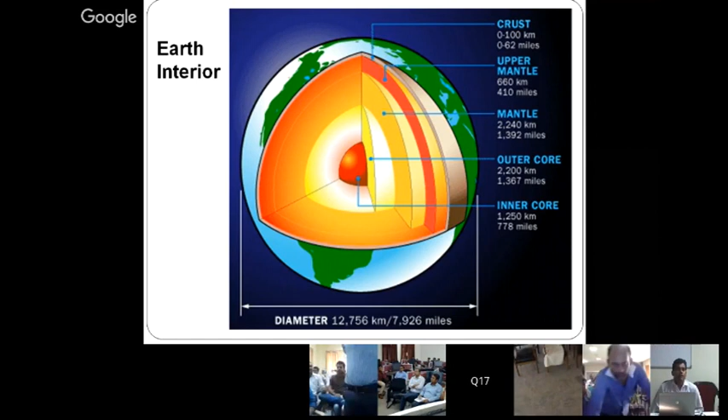So first, this is the Earth's interior. If you look at the Earth from the exterior, we can say our Earth is simple and unique, and integrated with each other, right? That's perfectly right. So when you look into the interior part of the Earth, you can see the innermost core, outer core, mantle, upper mantle, and crust. Crust is the region where we actually are.

So the inner core is a very solid part; the inner core is in the solid form, and the outer core is in the liquid form. The remaining layers are composed of sand and rocks.

So Earth has four major layers: inner core, outer core, mantle, and crust. Crust is the region where we actually are. The crust and the top of the mantle make up the thin skin on the surface of the planet. This skin is known as tectonic plates.

Tectonic plates are nothing but a plate kind of form, made of rock materials. We can say directly it's a rocky thing. Just imagine near the mantle we have many rocky surfaces. Like when you float leaves on water, similarly these tectonic plates exist in our Earth's surface, exactly near the mantle.

These tectonic plates are not a continuous plate. Before 1900, we used to think that these tectonic plates were continuous plates. But later, after 1920, we finally concluded in the year 1960 that these tectonic plates are not continuous; these are broken plates.

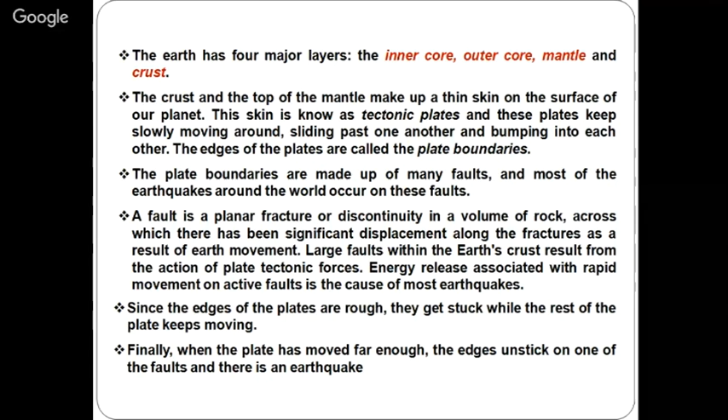Our Indian plate is one of the smaller plates and is merging with the Eurasian plate, exactly in the region of the Himalayan belt. That's why that Himalayan region is referred to as a very active seismic region, and we have many earthquakes there. Because when two plates are merging or colliding with each other, we can expect earthquakes.

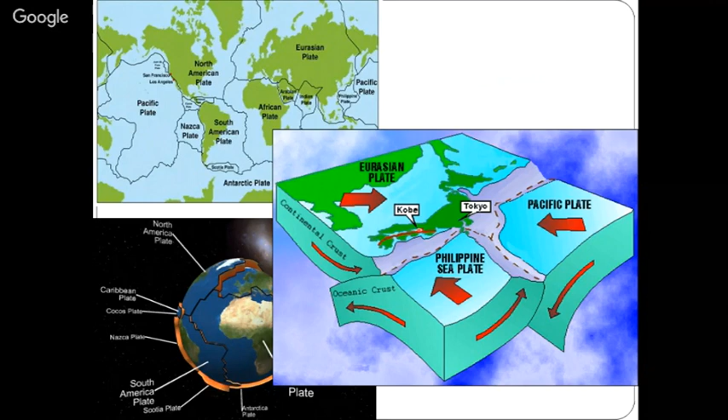It's not a bad thing, first of all. It's a very good one. It's nothing but releasing a sudden energy. So humans are living on the crust, which means the uppermost part of the earth. Okay, so we are thinking that earthquake will kill us. No, earthquake is not going to kill you and me. The building which we are constructing on the earth's surface will kill us.

So we have to construct our building to be an earthquake resistant one, so that we can resist a certain amount of earthquakes by using some modern advanced techniques, and you can easily survive during an earthquake. So earthquake, basically I told you, when two tectonic plates hit each other, there you can expect a certain amount of vibration. This vibration will release in the form of energy.

Because I told you tectonic plates are rocky materials. Rocky materials means it's an elastic material. So these elastic materials will store their elastic energy internally. When two plates hit each other, this stored elastic energy will come out from the internal part of the earth. That point is generally referred to as focus.

So basically, I told you tectonic plates are a rocky surface, but it's not always going to be a rigid surface. In some parts of the rocky surface, we can expect a certain amount of discontinuity in the continuous mass. This particular discontinuity is generally referred to as a fault. That is the weakest part of any tectonic plate. So when earthquake occurs, we can expect it exactly in the fault region.

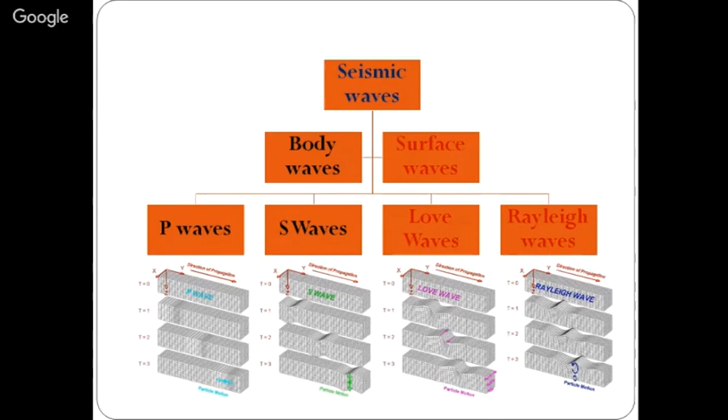These two waves are very strong compared with the body waves, because body waves will easily dissipate, but the Love waves and Rayleigh waves travel on the surface of the earth. That's why these two waves are the major source of any disaster on the surface of the earth, whereas body waves are not. You can see the first picture stands for the primary wave or P wave. This will travel like this.

No, it will travel on the surface only, not internally. That is the harmful one, yes. Love wave and Rayleigh wave are the harmful waves.

The next one, B, you can see the secondary waves. So when you have a rope, and if you play with the rope like this, the rope will travel in wave form. This is the way the S waves are traveling on the Earth's surface. Internally, these are the interior waves, the body waves.

Whereas C is like a zigzag form, and D will travel in a wave form plus it will squeeze. That's why Rayleigh wave is one of the strongest and most disastrous waves, creating huge disaster on the surface compared with any other waves. So primary waves are the fastest, but Rayleigh wave is one of the strongest waves which will create huge disaster on the Earth's surface.

So how do we measure these things? We have two different kinds of measurement for earthquakes. One is magnitude, another is intensity. Magnitude is measured in terms of the Richter scale, whereas intensity is measured in terms of the Modified Mercalli Intensity scale. There are two different scales we have.

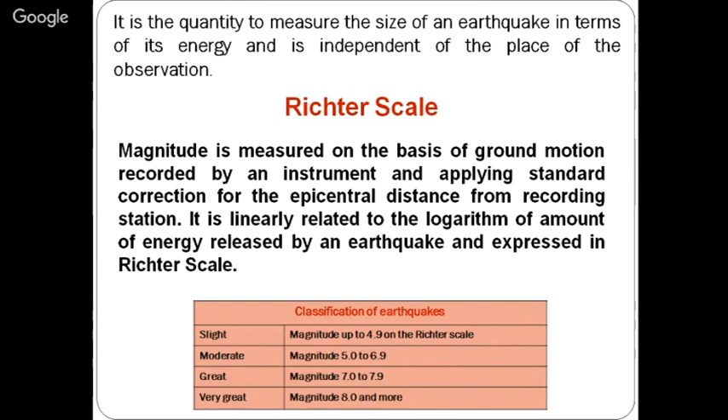So let us see the Modified Mercalli scale. This talks about intensity. What is intensity? Intensity is nothing but the amount of disaster we faced. Like when an earthquake occurs exactly in Chandigarh, the buildings constructed on the Earth's surface there will collapse or get damaged. This damage level is nothing but the intensity - the amount of disaster that occurs, what the damaged portions are, how that structure is damaged.

According to these things, we have created a scale generally referred to as the Modified Mercalli Intensity scale, MMI scale, ranging from 1 to 12. 1 stands for not felt by people, whereas 12 stands for huge or total damage.

For example, if an earthquake occurs at Chandigarh with a magnitude of 7, even if you measure it at America, the magnitude is going to be the same, 7. It's not going to change, but the intensity will differ. In America, the intensity is going to be 1, whereas in Chandigarh, the intensity is going to be 12. So that is the difference between intensity and magnitude.

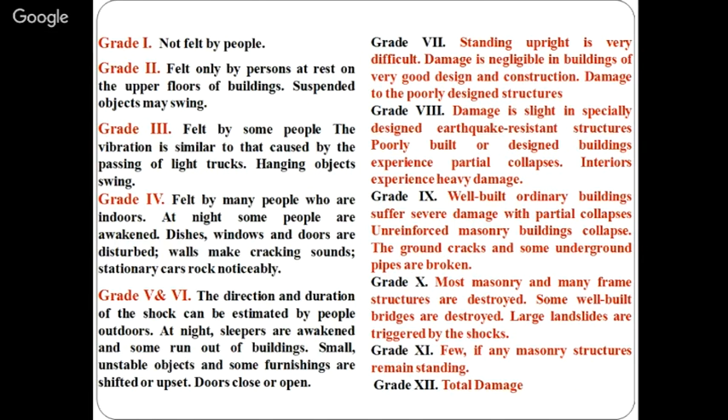What is the difference between zone and grade? Grade is nothing but a scale — grade number 1, grade number 2, grade number 3, like scale number 1, 2, 3, 4. So it is 1 to 12, that's it. Zone is completely different.

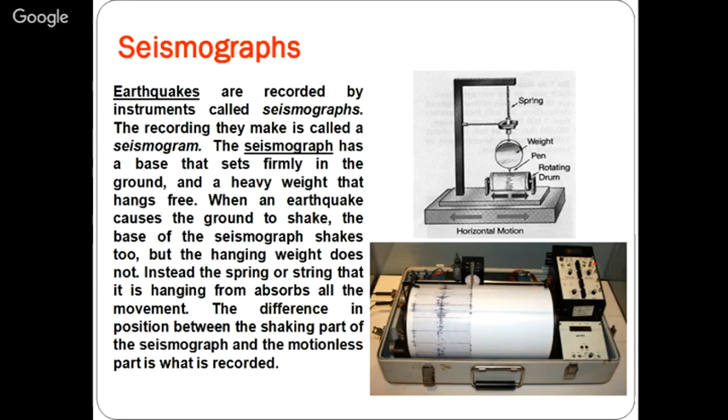In the recent form, we have advanced equipment which can easily measure acceleration, velocity, or displacement directly during an earthquake. Basically, these seismic stations are not on the Earth's surface; they are 10, 20, or 30 feet below the surface, because these equipments are very sensitive. Even if you speak, jump, or travel with a vehicle on the surface, it will record all the vibrations. That's why we keep all seismic stations below the ground surface.

You can see a model accelerograph where the first stands for the P wave — the first wave which informs any seismic station about an earthquake — followed by the S wave, the secondary wave. These two waves are body waves.

Let us come to the surface wave. This surface wave creates huge problems for buildings we have constructed, because these waves travel on the surface. If waves are traveling like this on the surface, and you are constructing a house on it, these waves will create severe demolition or disaster to what we have constructed. That's why these waves are generally referred to as surface waves, or very strong waves compared with body waves. This is how the graph looks, and this is how we separate the graphs to study or monitor.

Initially in the surface waves, the waves starting from S wave to surface wave are generally referred to as forced vibration — this is forcing the entire thing. Following the peak, we see a degradation in the graph, called free vibration, which means if you take a steel scale and vibrate it, it will vibrate for about a second until you stop giving it vibration.

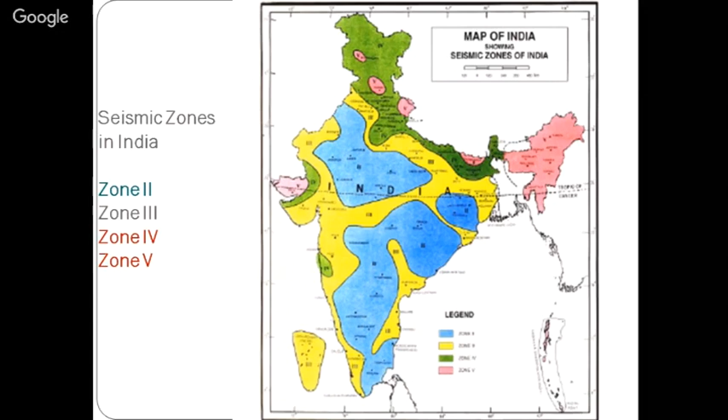I told you our Indian plate is merging with the Eurasian plate exactly in the Himalayan belt. That's why it is marked in zone number 4 and 5. Zone number 4 is green color, zone number 5 is pink color. You can see our Bhuj area in Gujarat and other parts of the Himalayan belt are marked by pink and green color. These are very important regions which stand for high numbers of earthquakes during a year. So we can't expect that an earthquake will occur in the next 6 months or next 1 year - at any time it may occur, but the intensity is going to be very high in those regions. That's why it is marked by zone number 4 and 5.

So what are the effects of an earthquake? You can expect landslides, surface faulting, tsunamis, liquefaction, and flash floods. If an earthquake occurs on the surface, we call that an earthquake. If it occurs below the sea, that is generally referred to as a tsunami.

I told you an earthquake is nothing but a sudden release of energy. If the sudden release of energy happens below the ocean, what happens? The water present on the sea surface has to absorb the energy and dissipate it. That is happening exactly at sea level.

During an earthquake, exactly at the midpoint of the sea, the depth is very large compared to the shore level. That's why there is no sign of wave movement during an earthquake occurring below the sea surface. But the tsunami will create huge disaster exactly at the shore level, not internally, because the depth in the middle of the sea is much larger compared to the shore level.

That's why the shore level depth is not sufficient to hold the energy released during an earthquake. That's why it dissipates there, so we can expect tidal waves up to 10 or 20 meters in height. That is nothing but the stored, released energy causing the tidal wave to travel to that height - the wave itself is not traveling that high, it is the released energy tending the tidal wave to travel up to that height.

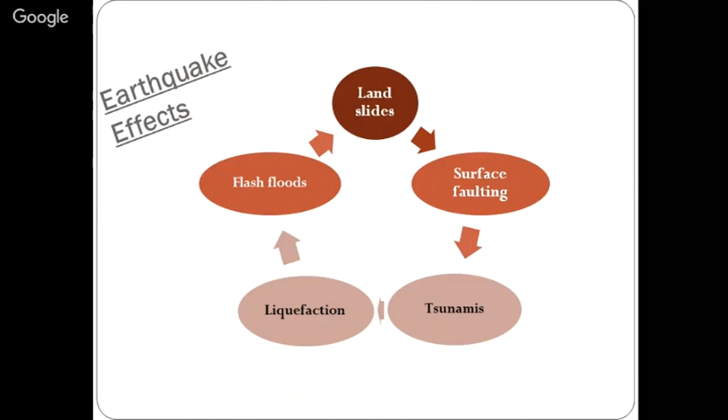Liquefaction - I didn't mention this, there is no slide for it. Liquefaction is: below the ground surface we have a groundwater table. When the entire earth surface gets vibrated during an earthquake, this water table will come up. When the water table comes up, a certain amount of settlement happens immediately. That is generally referred to as liquefaction.

So these are the different types of failure modes which we observe during an earthquake.

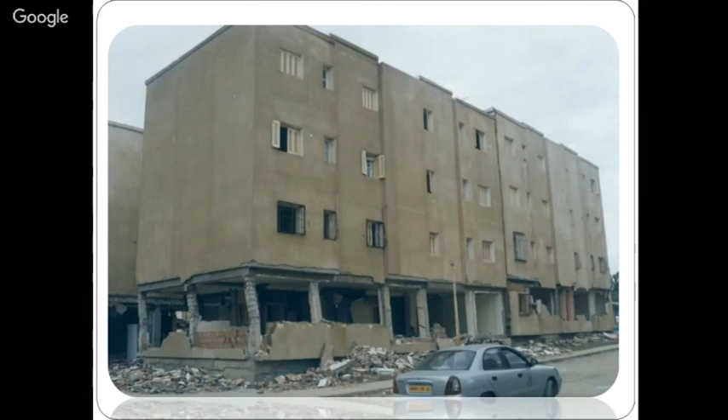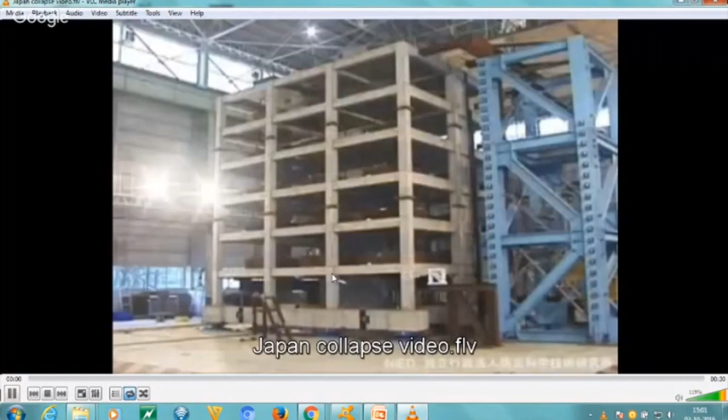So this is the building, ground story plus 5-story building. You can see this is being tested in a shake table. A shake table is nothing but an equipment which will give you a certain amount of vibration. You can define an earthquake vibration. So that will apply the vibration to the particular building so that we can study how the building behaves during an earthquake, a real earthquake. Okay.

So this is a G plus 5-story building. The ground story, again, in all the stories, there is no brick wall. It is a bare frame. Okay. So during an earthquake, how the building will behave, you can see. Now they are applying vibration.

So in this video, you can see the top stories still remain, except the ground story. The ground story is completely collapsed because, as I told you, this is a soft story and it is more flexible as compared with the other stories. The stiffness level of that particular story is very, very low as compared with the above stories. That's why exactly failure occurred in that particular story. These kinds of failures are generally referred to as soft story failure.

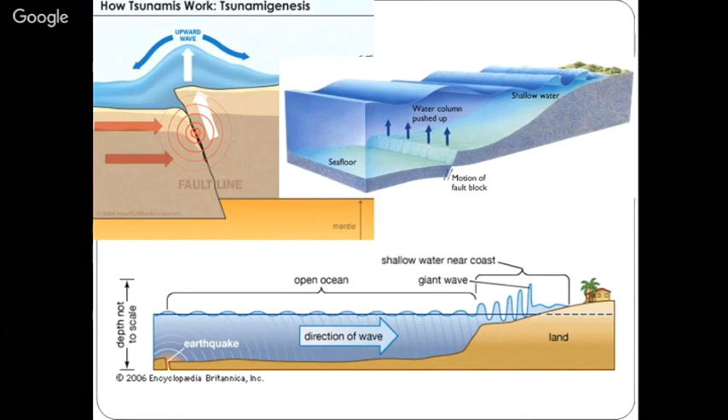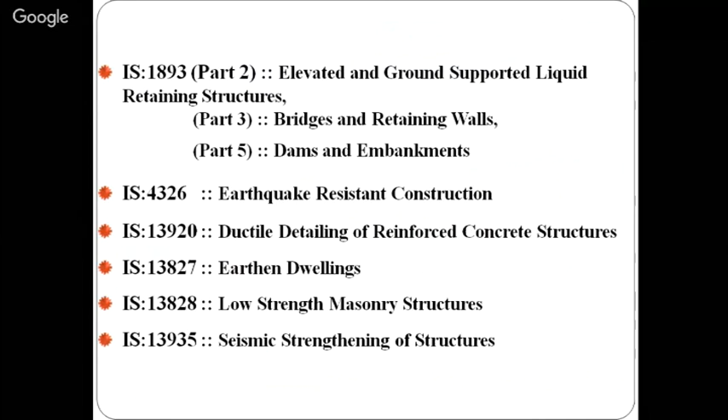So what does it mean? What is the difference between proof and resistant? Proof means nothing will happen, whereas resistant means something will happen to a building, but it is not going to collapse completely. That is the meaning of resistant, and that's the difference between resistant and proof.

Most Indian low-rise buildings are constructed in this form only, using the load-bearing structure concept, because it is quite economical as compared with RCC frames and very cheap, and even non-skilled labor can construct this kind of building. That's why most low-rise buildings are constructed with the help of this concept.

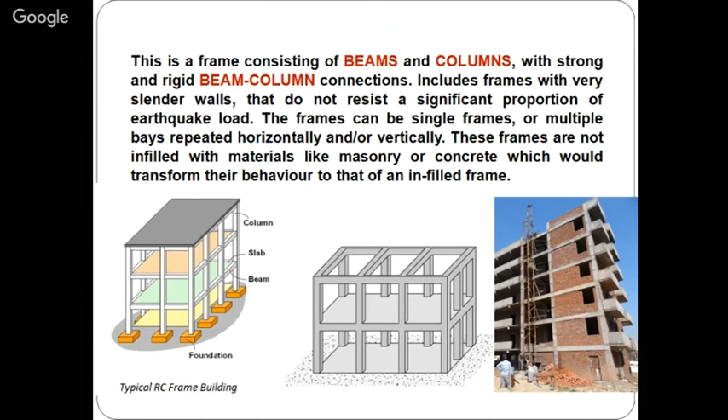In this building, the very important part of the building is not the column, not the beam, but the connections. Connections at all levels. So you can see the foundation to column connection is very, very important. And similarly, the beam to column connection is one of the very, very important parts of this particular building. We will see why it is very, very important.

So what are the things we can do? Earthquake resistant measures at planning stage. It should start from the planning stage. Like, see, if you have a solid surface, we can execute the construction immediately from the foundation. Suppose your foundation level is not solid, so if you are filling with soil, our foundation should not be on the filled up soil. The reason is an existing firm soil has a very good consolidation as compared with the filled up soil. So you can't meet the consolidation level of the firm soil using filled up soil.

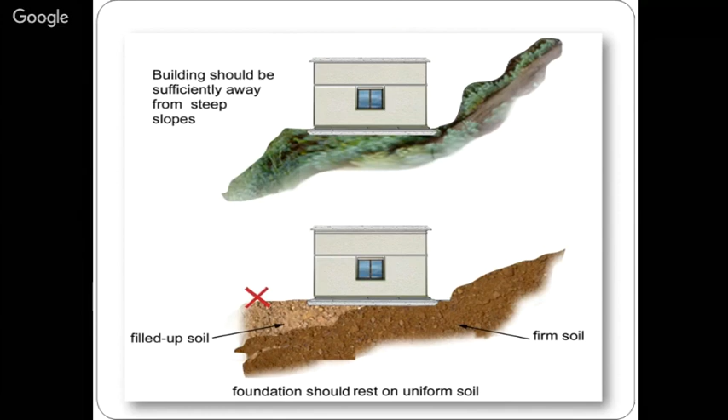So in such circumstance, you can go for raft or pile foundations, because we need pile foundation only in the filled up soil surface. Whereas in the firm soil, the consolidation level is already good, so there is no need to go for extra consolidation or any pile construction. So you can go for pile construction.

The next one is, if your building is not only in rectangle shape, we can expect T, L, U, or C shape, any shape. But the thing is, one building should not have contact with another building. So the first is T plan. The next one is how it should be. The T should have a separation joint.

The reason is, if you take two stainless steel scales and keep them with each other, okay, and try to vibrate it, what will happen? One steel scale will touch another steel scale. So what does it mean? The effect of one will create effect on another. That is the meaning for this.

So when you have two different buildings, we should have a proper gap between these two buildings. So what will happen during an earthquake? Both the buildings will vibrate in their independent mode. So one vibration will not create any problem to the next building. That's why we have to have separation joints between any part of the building.

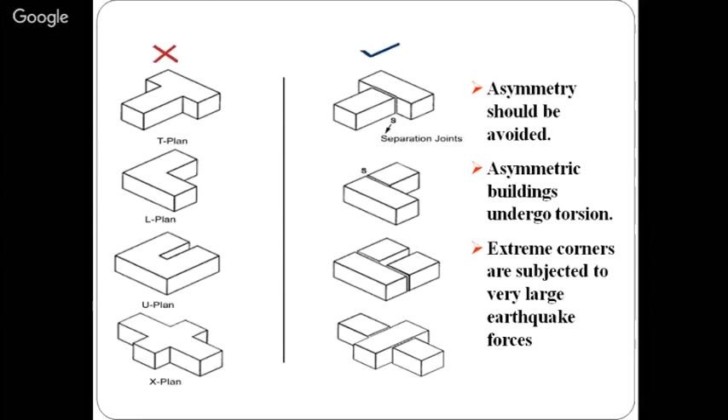I told you, if your building has no connection... so the first image stands for how it should not be. The next one is how it should be. So when you have connection, the failure will exactly occur at the corner point. When you don't have any connections, both the buildings will vibrate in their own mode. So this is how it should vibrate.

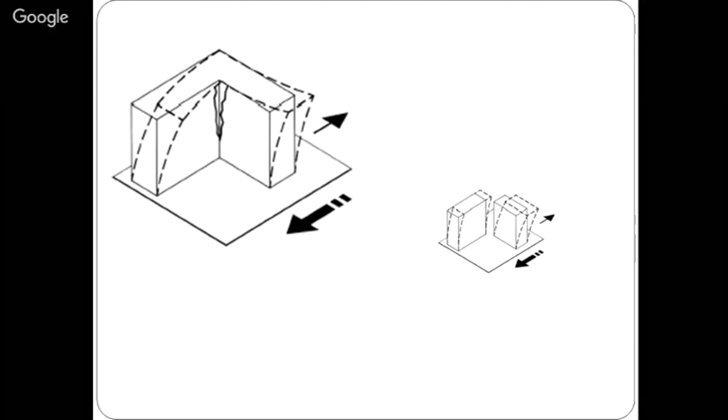Next one is, we have water. Just give me that.

So you can see this example. This is the water can I have, and now even if I vibrate the table, the water can is going to be in ideal condition. The internal liquid in the water can is vibrating. Even still, the entire water can is also vibrating, but it is not falling down. The reason is the base is very solid, whereas the top has a narrower portion. That's why it is not falling down.

Suppose if I keep it like this, the base is very small as compared with the top. Now, even if I apply small vibration, the entire water can collapses. Okay. PPT.

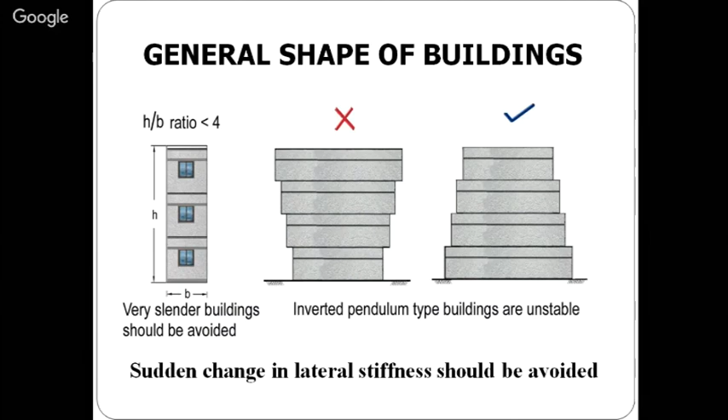See this case. That's why our earthquake resistant design philosophy says that the foundation width should be higher than the top width, so that it can easily resist any kind of earthquake. So plan wise, we have to make our building safe, and elevation wise, we have to make our building safe. If we have different height buildings, again we have to make proper separation joints. Otherwise, the vibration of one part will create adverse effect on the other.

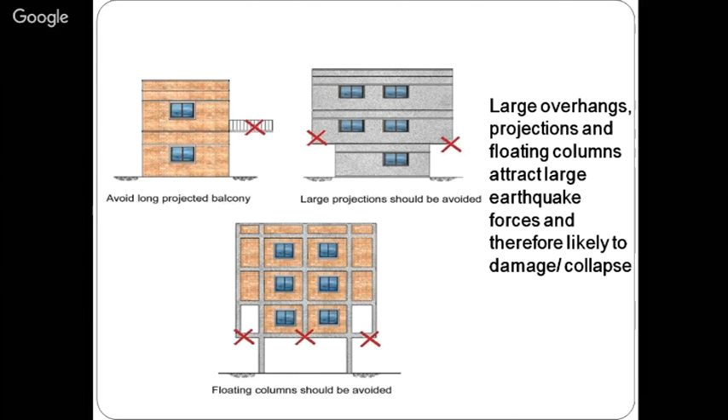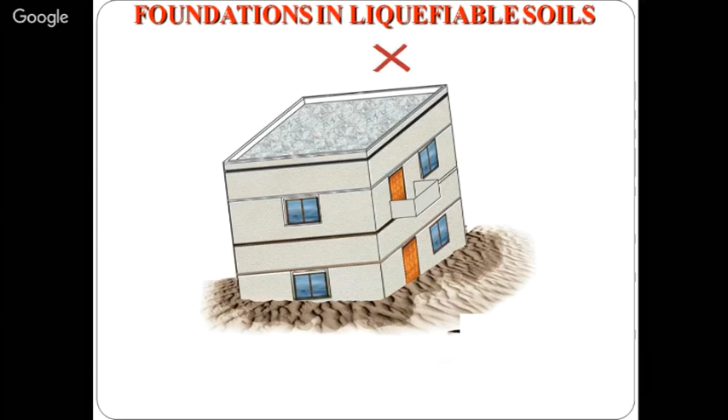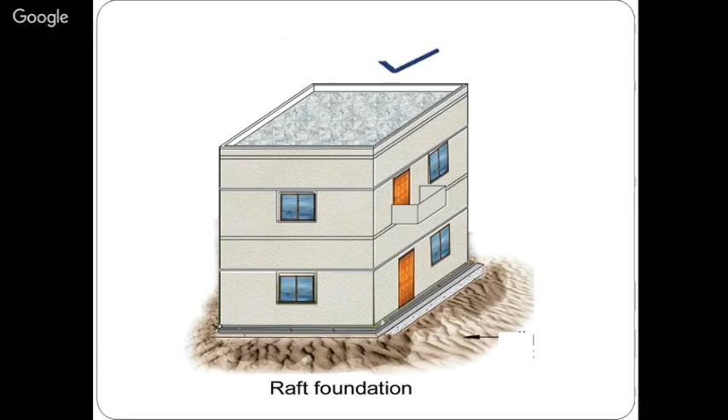So raft is nothing but our entire building is going to be on a single platform. So one side liquefaction or one side settlement is not going to affect the other part. Or even if it settles, the entire building is going to settle in a similar way. So the settlement is going to be uniform everywhere. So it's not going to create any harmful defect to my building. Or you can go for pile foundations.

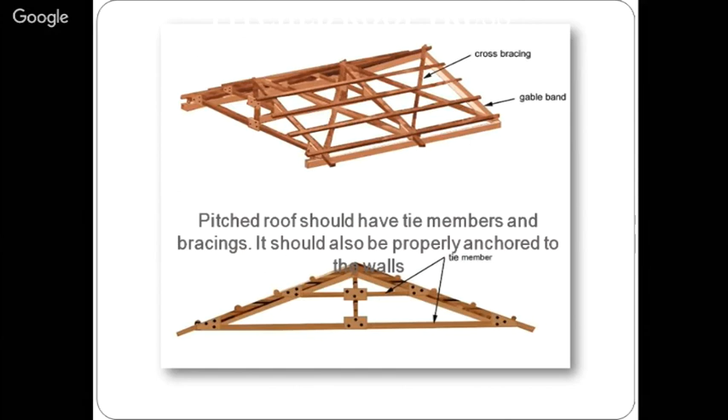Just look into the second one. In such circumstances, we should not go for the triangular wall, that is the gable end wall. We have to go for a hipped roof, which is perfectly defined in the second image. So not only at the roof level, we have to make our entire truss in this form so that it can easily resist any kind of lateral movement.

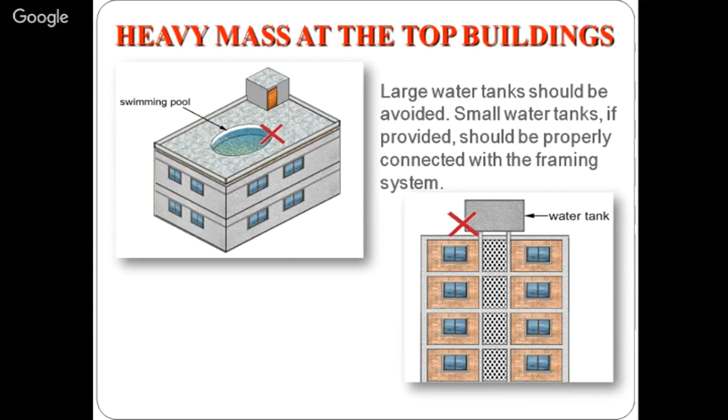Similarly, water tanks are one of the very important parts of the building, which supply water. At the same time, they are one of the very crucial parts of the building during an earthquake. It is again unsupported. It should not be. So when you are constructing a water tank along with your building, we have to follow certain procedures. Otherwise, it will create a sudden collapse at the top level, and that will create huge stress on the next stories.

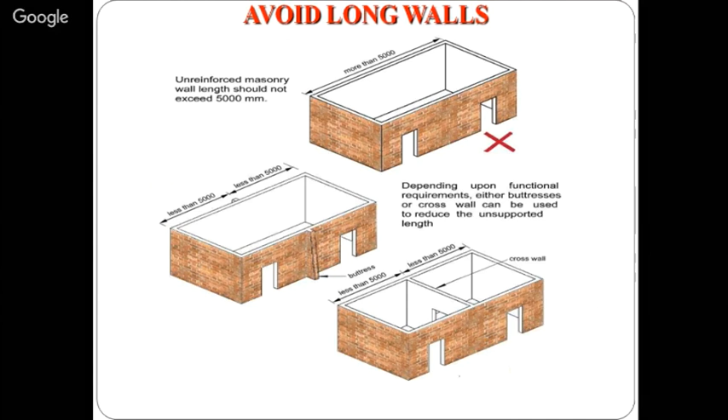So I told you that our masonry structures are weak in tension. So it is very difficult to construct a long wall using masonry. Even if you want to construct a long wall, we have to go for cross walls, or otherwise we have to create a buttress at specific levels. When you are constructing a buttress, the buttress will give external support to the long wall, or otherwise we have to go for cross walls as defined in these images.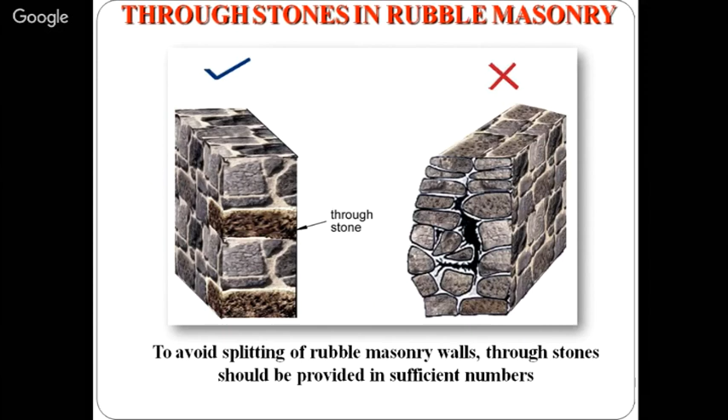The through stone methodology should be followed in the wall connections, because in the wall connections, we have to keep the wall connection. If you have a wall like this, and you are connecting like this, what will happen? There is no perfect connection. So during an earthquake, this wall will fall like this.

So in this case, when you are connecting the wall like this, when an earthquake occurs, it can jointly resist any kind of forces. That is why we have to go for through stones as defined in this picture. Through stone is one of the very simplest methods, but not the only one. When you are constructing a masonry structure like this, we have to go for a band.

You might have seen small beam kind of structures in masonry structures; that is generally referred to as a lintel. Or in old construction, we used to have a long stone over the door or over the window. The reason is the wall structure above the window or door should not rest on the door frame or window frame, because these frames are not designed to resist such a load. That's why we used to have a long stone.

Nowadays, we are not following that. We are having lintels. So in lintels, we are constructing the lintel with small steel rods for a small depth with plain concrete. Jointly, it is a reinforced concrete element.

Similar to lintels, we have to provide those kinds of structures at different levels: plinth level, lintel level, and roof level. Those are generally referred to as bands, that is plinth band, lintel band, and roof band. What is a band? I will tell you in the next images.

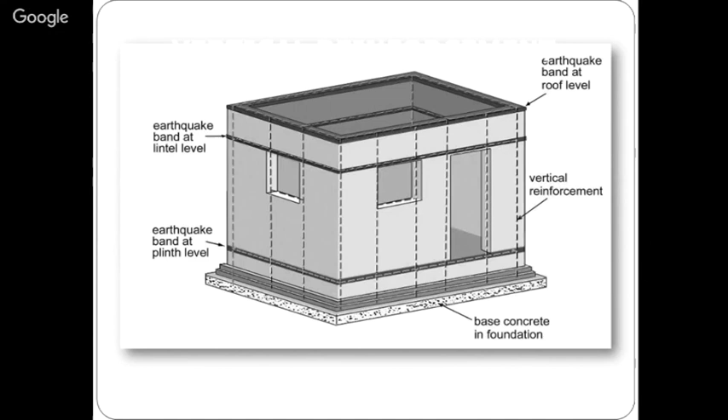And plus vertical reinforcement. This is not an RCC building, this is a masonry structure. Vertical reinforcement means we are not recommending 4 to 5 vertical bars at a single corner. Only one reinforcement at every corner and at every opening. Like in this image, at the corner we have vertical reinforcement, and exactly at the door opening and window opening, we have vertical reinforcement. So this is the vertical reinforcement and band.

Our IS code is not only recommending steel, it is recommending bamboo sticks also, or cane wood. You can go for cane wood or bamboo sticks to make the band. This is how we have to make the band and vertical reinforcement. This vertical reinforcement will interlink the bands in X and Y direction, and it will create integrity between these two. So this is how the reinforced concrete band will be.

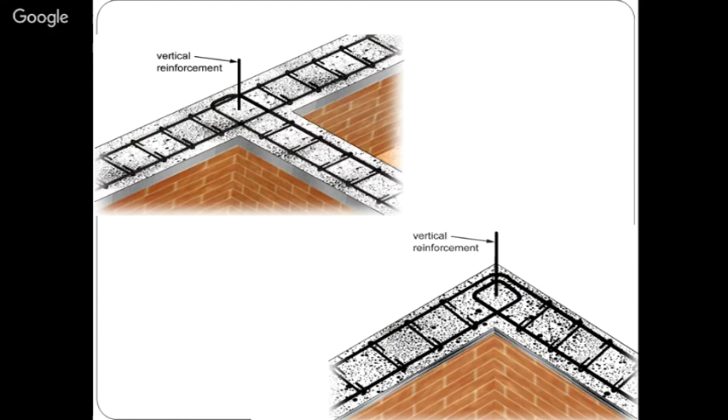For a T connection, we have to follow the first procedure, and for a corner connection, the second procedure. It is perfectly defined in the IS 4326 code book. You can follow IS 4326, that is earthquake resistant measures for masonry structures. These are various images of building failures we observed during earthquakes.

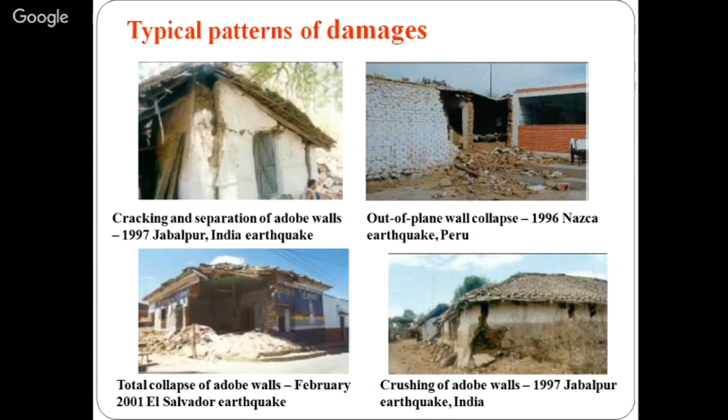What we are trying to develop in a masonry structure is box action. If you keep a square or rectangular box on any platform and vibrate it, the entire box will move. Suppose you create a dummy box with small thermocol sheets without proper connections at the corners and subject it to vibration, what will happen? If the corners are perfectly connected, the box will resist vibration. If not, the box is not going to resist any vibration.

When the entire box is subjected to vibration, the connections will fail at the very initial stage, so the entire building will collapse. This is how it will behave during an earthquake. That's why we recommend corner stones at the corners. If you have perfect connections at the corners, the entire building will behave like a box.

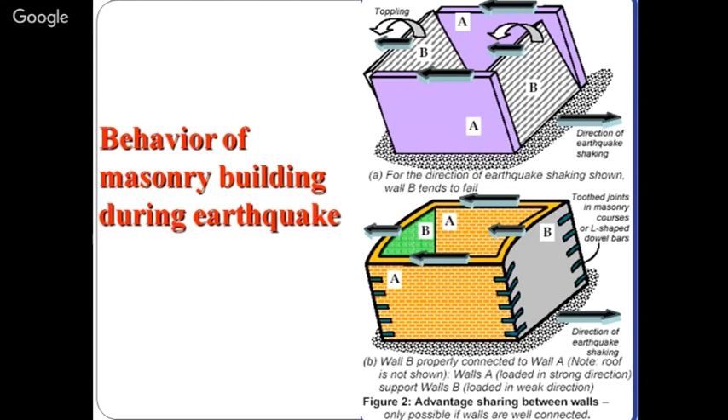And similarly, staircase. When you are constructing a staircase in any building, it should be separated from the building, because staircase is a reinforced concrete element, whereas our masonry structure is not a reinforced concrete element. So it should not have a perfect connection. It should have a perfect gap between these two structures.

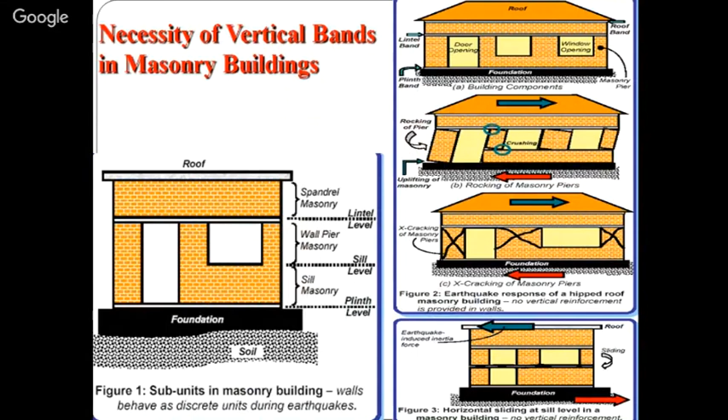So when you have a building, masonry building, during an earthquake, it will behave like this. In order to address this issue, we are recommending different level of roof band, lintel band, and plinth band, and sill level band if required, plus vertical reinforcement. When you have vertical reinforcement and band, the building will deform gradually.

This building will have damages during an earthquake. We are not telling the building is not going to damage. It will damage, but it is not going to collapse. It is not going to kill you or me. The one who is going to be in this house will be perfectly safe during an earthquake.

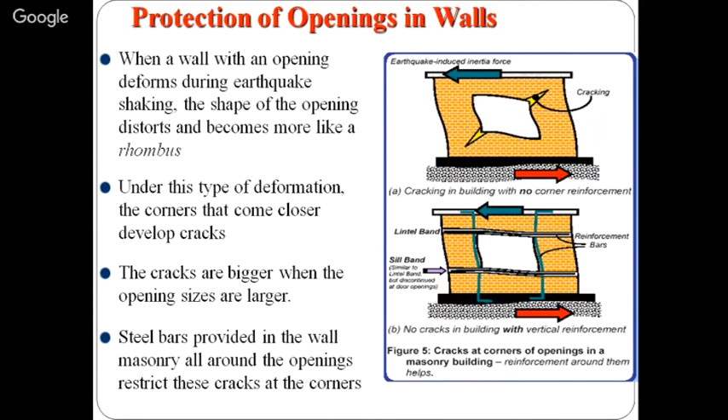So when you have open windows like this, exactly at the corner level, huge cracking will occur. This cracking will allow the entire building to collapse. When you have vertical reinforcement and lintel band and sill band, these bands will perfectly connect and will perfectly resist any lateral deformations.

Those recommendations are for new buildings. When you have an existing building and if you want to upgrade the building, these are the various procedures. I told you we have to make a through stone in random rubble masonry structure. But in the case of existing building, it is very difficult.

So what we can do, we can make small holes and we can fill the entire small hole with the U-shaped or hook-shaped reinforcement steel rod. That's a very small steel rod having S shape. It is defined in the first picture. The remaining gap can be filled with any mortars or any concrete.

Similarly, for masonry structure, I told you we have to go for a vertical reinforcement at corners as well as the openings. But in existing building, it is very difficult to have a vertical reinforcement. So what we can do, we can go for weld mesh on both sides, internally and externally. Both the weld mesh, internal and external, will be perfectly connected by interlink steel bars.

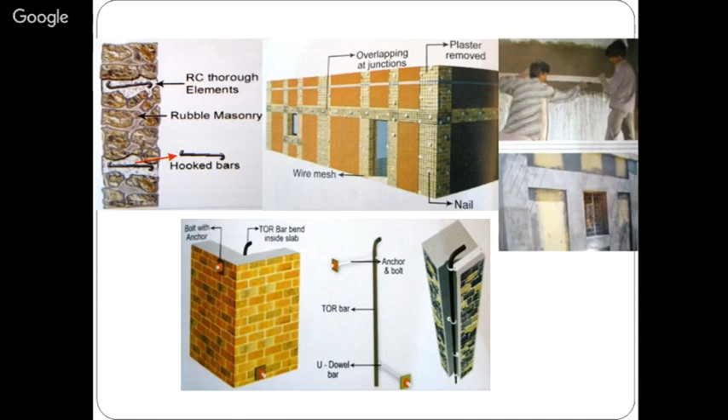Now, when you plaster the entire internal surface and external surface, it is going to be external reinforcement. So it will resist any kind of deformation, lateral deformation. So this is how we have to upgrade an existing building to be an earthquake resistant one. So far we have discussed earthquake resistant measures for the masonry structure. Now earthquake resistant measures for RCC frame structure.

See, this is the RCC reinforced concrete building with infill frame. Infill means brickwork. Internally we have brickworks and the outer frame is RCC frame. So during a minor earthquake, we can see the internal brick walls are cracked. Let us come to the moderate shaking.

When the earthquake is in the moderate level, the crack occurring in the brick wall is creating stress exactly at the beam, exactly at the column connections. When you come to the third picture, during severe earthquake, the brickwork is creating huge distress to the beam as well as the beam column elements.

Plus, the deformation occurring due to an earthquake is also exactly at the beam column connections as well as in the foundation connection. That's why I told you in the very first stage that foundation to column connections and beam to column connections are very important points, so that you can easily resist any kind of deformation with any kind of earthquake. Otherwise, the building is not going to deform. Which means what? Take an example of coconut tree and banyan tree.

During severe wind, a coconut tree can deform like this easily. Finally, it will come to its original position. When you come to banyan tree, it is not going to deform. It is going to resist the wind force up to a certain limit. After that, it will completely fall down. It is not going to resist.

But our concrete is not a ductile material, it is a brittle material. It is not going to deform like the coconut tree. So that's why we are introducing steel reinforcement in the concrete members. That's why they are generally referred to as reinforced concrete members. So these are the various failures that occurred in reinforced concrete buildings during earthquakes.

You can see in this image the top stories are still active compared with the ground story, because the ground story is the weakest part, a soft story. So this failure is generally referred to as soft story failure.

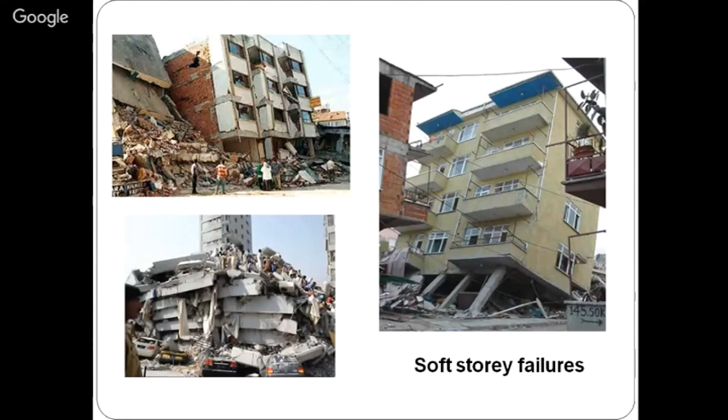So what happened actually in this case? It is not perfectly designed. During an earthquake, these columns are not able to resist any deformation, so the column failed, and the entire one floor is resting on another floor. So it's a 6 to 7-story building, perfectly packed like a burger. See the other failures, these are all soft story failures.

You can see the top story is still active, but the bottom story has failed.

So this is what they are expecting. The first one, hinges. Hinges are nothing but, you might have seen hinges in a door. When you open the door, you can open it, and when you close the door, you can easily close it, because the door is perfectly connected with the door frame with the help of a hinge. If you don't have the hinge, you can't open or close the door.

The same kind of hinge formation should occur in the beam column joint connection, as defined in the first one: location of potential plastic hinges. So we are not going to construct hinges like in a door, but we expect the entire frame to behave like a hinge. The entire particular location should behave like a hinge, so that the entire building can deform like this.

So if the joint allows the entire building to deform gradually like this, what will happen? We can expect and resist a certain amount of deformation. So my building can go up to a certain amount of deformation to resist an earthquake. This is like the behavior of a bamboo tree. This is possible when the plastic hinges form exactly at the desired locations as defined in these images. If not, what will happen?

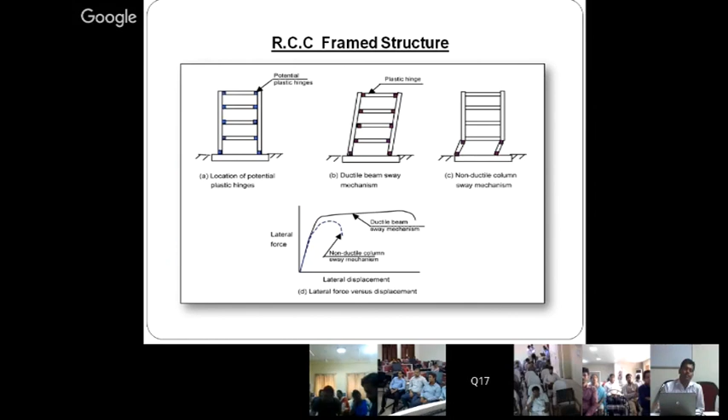The third one, you can see the third picture, non-ductile column sway mechanism. In this case, what will happen? In this image, the third one stands for soft story failure. So the hinges form exactly at the soft story level, so the failure occurs exactly in the ground story. This is generally referred to as soft story failure.

So the previous first two stand for ductile mechanism, whereas the last one stands for brittle mechanism. Brittle mechanism means immediate failure. Ductile mechanism means it's not an immediate failure.

So our building should behave like this. During this deformation, your beam column joint is subjected to huge distress. So in this case, our beam column joint should be able to resist large amounts of deformation and large amounts of shear force transformation. So our beam column joint is one of the weakest and very, very prime parts of the building.

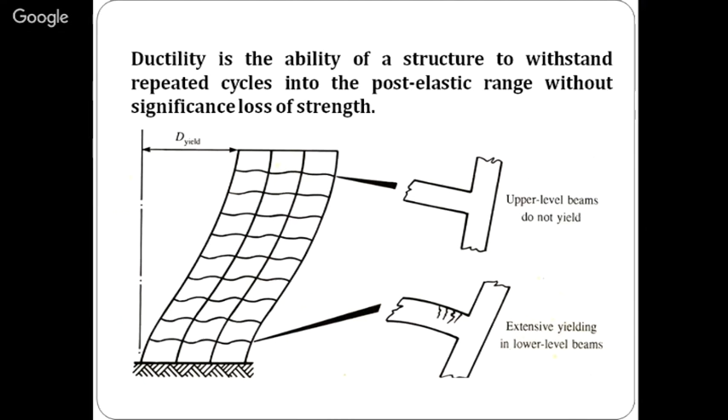Interior, exterior, and corner. The stress transfer mechanism of the joint is very simple. All loads due to the masonry wall transfer to the beam. The forces in the beam transfer to the column through the joint, and finally reach the foundation. So all forces travel from every independent member through the joint to the foundation. The joint is one of the very important members in transferring all the forces.

If the joint fails, we can expect a global failure. If the joint is not failing, then you can expect a localized failure. Localized failure means failure in any independent structural member, and global failure means the entire building collapses.

This is how the stress transfer mechanism happens. During deformation, during ground vibration, our building is going to deform. Concrete is a very brittle material, so immediately the tensile stress level is going to be higher, and you can expect cracks at different levels. These cracks allow the reinforcement to slip from its original position.

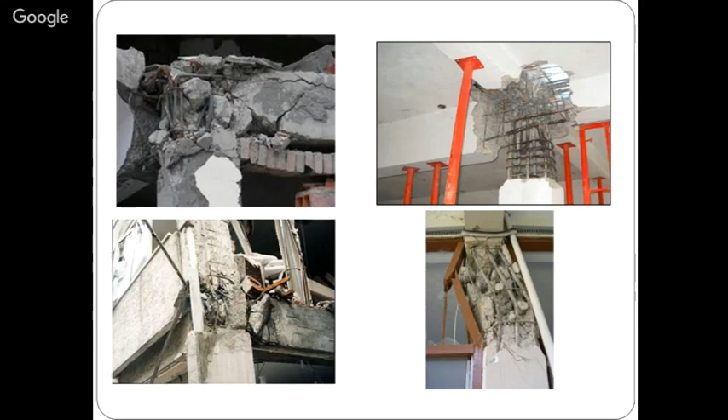So how to construct an earthquake resistant structure? We have to design our building with respect to IS 1893. We have to detail the structure with respect to IS 13920. What does design and detailing mean? Designing means we follow the procedure defined in IS 1893, which includes the load cases with factor of safety. Whereas in IS 13920, after designing the building with respect to 1893, you have to perfectly detail the building. We will discuss that in later slides.

This is the planning stage. When you have a very long building, it should not have an opening like this. This is generally referred to as diaphragm discontinuity. So when you apply force on one side, it is not going to transfer uniformly to the other side because of this opening. Now come to the next case - stiffness irregularity.

Stiffness irregularity means the first floor stiffness should be equal to the second floor, which should be equal to the third floor, which should be equal to the fourth floor. When your stiffness is not the same for the first, second, and third floors, that is generally referred to as stiffness irregularity.

So what will happen when stiffness irregularity occurs? For example, our ground story height is 10 meters, the first story height is 6 meters, and the second story height is 6 meters, but the ground story height is 10 meters. So it is going to be very slender compared with the first and second story. In this case, the stiffness level of our ground story is very less compared with the stiffness level of the first and second story. The slenderness creates the weaker stiffness part of the building.

This will lead the entire building to fail due to weak story or soft story failure. It is perfectly defined in this picture. It means in old multiplexes where we go for parking at the lower level at the ground story, it's a kind of soft story. It's going to be damaged very easily.

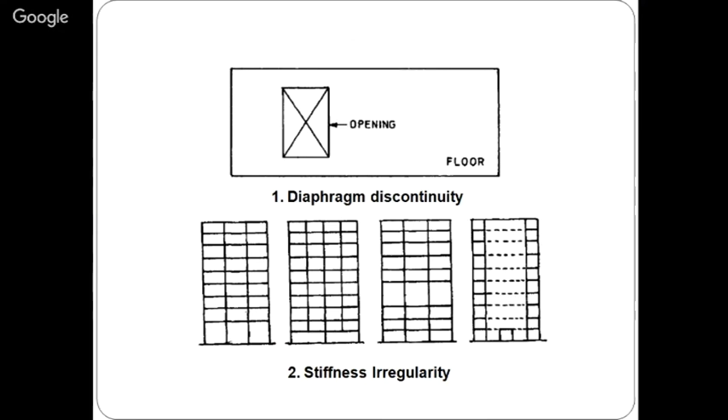For example, I have a column, and internally I have a brick wall. So when it deforms like this, immediately the deformation will transfer to the brick, and immediately the brick will fail. Brick is not able to resist any kind of force because it is a brittle member.

But the brick is perfectly confined between column and beams, so the stress due to this brick wall will transfer to this joint level at this connection. When it travels in this direction, it transfers to this joint. So if your brick wall is 300 mm thick, the stress level is going to be very large. With very small thickness, it will immediately fail and fall down. That is the concept behind reducing the brick wall to partition size.

Similarly, if you have a water tank on the building, the water tank is nothing but heavy mass in the structure. So we should not have heavy mass on the structure at any intermediate level.

For example, take a scale, and the scale is going to have a uniform weight, a stainless steel scale. On the top of the scale, just keep one magnet of weight around 200 grams. Now the top of the scale has higher mass compared with the bottom level. So when you vibrate it, the vibration is not going to be the same as the scale which has no magnet. Both vibrations are completely different.

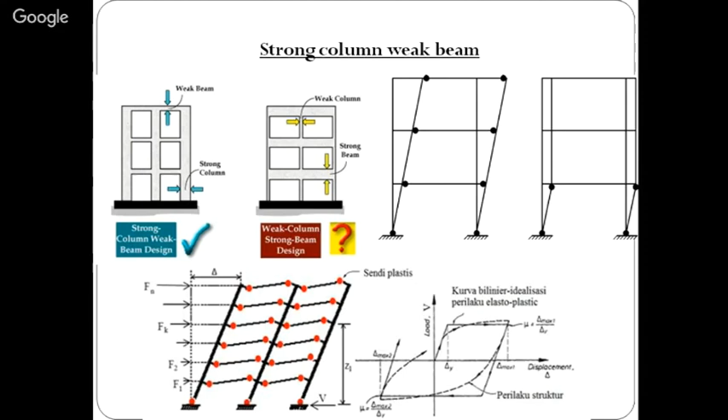So when you have soft story failure, the displacement of the building is very, very less. I told you our building should deform like the coconut tree. It should not deform like the banyan tree. So when you're expecting your building to deform like the coconut tree, the deformation should be very large. It should not deform in a very small way.

So the first one is a perfect example of how it should not deform. The next one is a perfect example of how it should deform. When it deforms like this, you can expect a huge deformation as compared with the first one. This is generally referred to as ductile mechanism.

So for this case, this is the column and this is the beam. Okay, so when the building deforms, we can expect this connection should deform. If the connection is not deforming, then we can't expect ductile mechanism. In this case, what we have to do, this is the column and this is the beam. Okay, so we are connecting the beam like this.

What will happen if you are connecting the beam like this? When the entire building is deforming, if the connection is not strong, the beam will fail. But we are expecting hinges to be formed in this particular connection. If hinges are forming in this particular connection, these hinges will create huge stress transformation to the joint. So our beam connection should be very, very strong.

In this case, if I have a connection like this, it is weak. Then what I have to do, my beam should be perfectly connected internally into the column. Okay. So this, for example, is reinforcement. It is going into the column reinforcement like this. Now it is already into the column. Now these are vertical reinforcement from the column. This is horizontal reinforcement from the beam.

So you can see in this picture, the vertical stands for column, the horizontal member is beam. The top reinforcement is going down, the bottom reinforcement is going up. This is to anchor the beam with the column, so that the beam will not fail during an earthquake, because we are expecting the plastic hinge formation exactly at the beam column connections. If the beam fails, there is no plastic hinge formation, so the entire building will fail again.

So even after anchorage, we have to go for detailing. This is what IS 13920 defines. So designing is separate, detailing is separate. Even with the proper design, if you're not detailing, the building will again fail. So what is detailing? Detailing means you have to give a detailed definition for the confinement and the reinforcement positions. That is why it is generally referred to as detailing.

So in this case, confinement is very, very important. Basically, our concrete member, column member or beam member, has two concretes. One is core concrete, another one is concrete cover. Concrete cover plays a role where durability speaks, and core concrete plays a role where ductility plays. So for ductility, core concrete plays a very crucial role. For durability, concrete cover plays a crucial role.

So in this case, earthquake resistant measures deal with ductility. So concrete cover has no role, just to cover the confinement. That's it. Our confined concrete, that is defined as core concrete, plays a very, very important role. So we have to make the concrete so confined that it can easily resist any kind of lateral deformation plus shear stress transformation. How to improve the performance of core concrete? We have to confine.

When you have a confinement like this one, it's a very close confinement. So I can easily confine the concrete which is present inside the confinement. That is generally referred to as core concrete. So we have to protect the core concrete from large deformation so that it can resist the large deformation. For this case, we need closer confinement as defined in IS 13920. And IS 13920 is not defining this critical confinement everywhere.

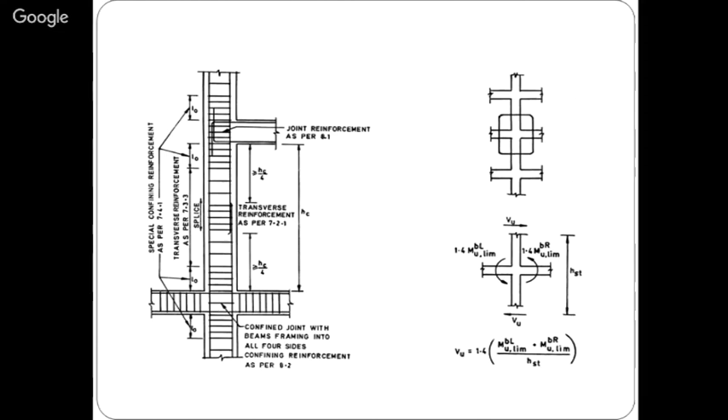It is defined only in the critical portions of the building. You have to follow certain codal procedures so that you can easily resist any kind of earthquake forces. If you're not following them, it is very difficult to resist any kind of forces. And very importantly, we are making hooks, that is stirrups. These stirrups are not only in the beam column joint range but also in the foundation range, because we are expecting a plastic hinge exactly at the foundation level also.

Otherwise, if you have 90-degree hooks, what will happen when the deformation occurs or when you apply large force? The 90-degree hooks will immediately open. When you have 135-degree hooks like this, it will not open. It will create a perfect link like this. When you have 90-degree hooks during the application of large axial force or large deformation, they immediately open, so we can't confine the concrete, and immediately the confined concrete will fail.

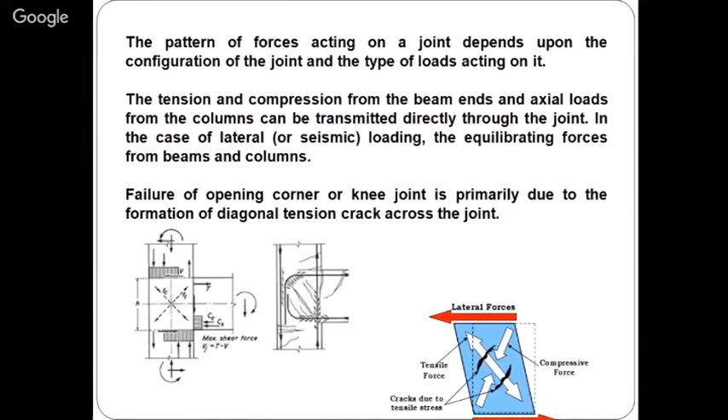So these are the various codal procedures defined as per our Indian standard. When you follow all these procedures, you can easily construct a new house to be earthquake resistant. But I can't construct a house myself. So we hire a person from outside, a mason, and he executes the building, along with a bar bender. If you ask him to go for a 135-degree hook, he will tell you it takes too much time, has no role and is completely useless. So what will you do? You will accept the 90-degree hooks so we can execute.

Similarly, a mason will tell you that closer confinement creates congestion, so he can't do perfect concreting work. So again, we are compromising there. And in any new construction, you can see they raise the column up to the beam bottom. This is the beam, this is the column. Then when you insert the reinforcement of the beam, you can't get perfect anchorage. Again, we are compromising here. So when you make all such mistakes, you can't resist any kind of earthquake.

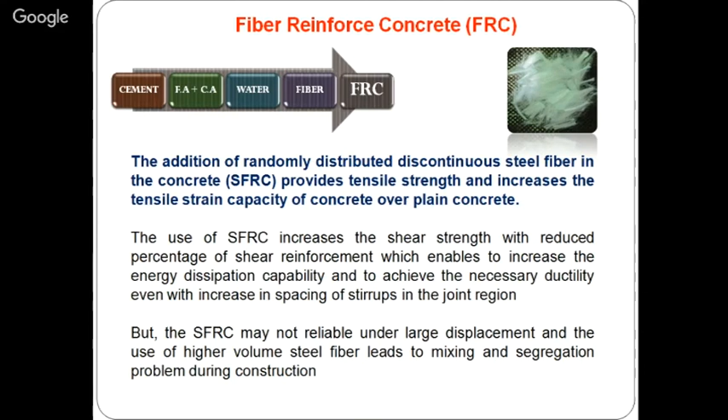One of the very easily available materials is generally referred to as fiber, in the form of metallic or in the form of synthetic. This concrete is generally referred to as fiber reinforced concrete. What does it mean? We have a normal concrete composed of aggregate, that is coarse aggregate, fine aggregate, cement, and water. This is the normal composition of your conventional concrete. Whereas in this case, cement plus fine and coarse aggregate plus water plus fiber. That is generally referred to as fiber reinforced concrete. So this is an example of synthetic fiber. This is an example of steel fibers.

See, this is the beam. When I'm applying load, there is a crack formation like this. In the conventional concrete, if the crack opens like this, what will happen? This crack will open and finally the beam will become two halves. When you have fibers, it will bridge the cracks. So if I have fiber between these two cracks, it will not allow the crack to form or grow easily. It will bridge or stitch the cracks perfectly. So until the entire fiber fails, the crack formation or crack growth will remain very slow.

And once the entire fiber fails, then the crack formation will be very, very high. So the crack formation is very important in the failure stage. In the conventional concrete, there is no method to bridge the cracks, so immediately failure will occur. Whereas in fiber reinforced concrete, the fiber present between the cracks will perfectly bridge the cracks and allow the crack to grow at a very gradual rate as compared with plain cement concrete. So these are the advantages of fiber reinforced concrete: it will resist crack formation, improve the damage tolerance capacity, add tensile behavior to the concrete, and allow the entire structure to undergo larger deformation without going for any critical confinement in the joint region.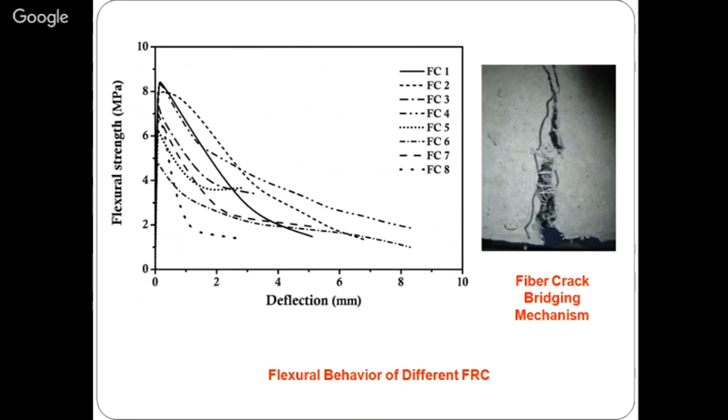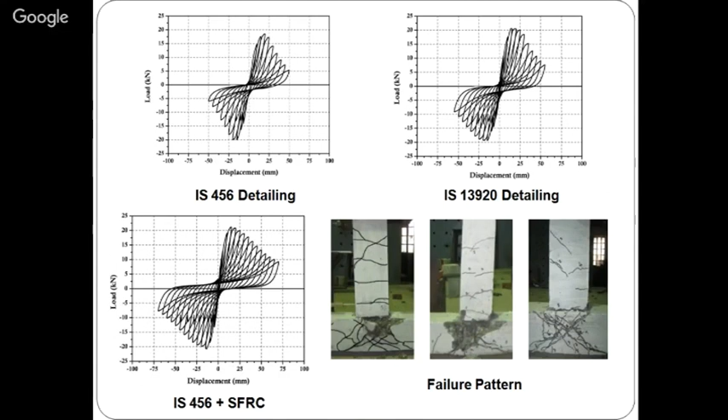Come to the case of the third one, that is steel fiber reinforced concrete with 456 detailing. There is no earthquake resistant detailing. Even so, there is no spalling of concrete, and it has very good load resistance capacity and crack resistance capacity. There is no concrete spalling in the joint region. This is the advantage of steel fiber reinforced concrete. Similarly, if you are going to construct a house in zone 5 and the building height is very high, what will happen when you increase the building height?

The building vibration is also going to be very, very high. So in this case, your conventional concrete method is not going to work. Even fiber reinforced concrete is not going to work. In this case, what we can do is go for the advanced level, which is generally referred to as fiber reinforced cementitious composite.

I told you in conventional concrete, we are using cement, coarse aggregate, fine aggregate, and water. In fiber reinforced concrete, we are adding fiber to the conventional concrete. Whereas in this case, there is no coarse aggregate. See, in this case, we are adding cement, fine aggregate plus mineral admixtures. Mineral admixtures are nothing but silica fume, fly ash, or GGBS, anything. Such waste material is very, very fine material that will fill the pores present between the sand.

Water, admixtures, and fibers; that is defined as high performance fiber reinforced cementitious composites. It is not concrete. It is cementitious composites. You can see this will work far better than steel fiber reinforced concrete or any fiber reinforced concrete. So that's why these kinds of composites are recommended for buildings that require large deformation.

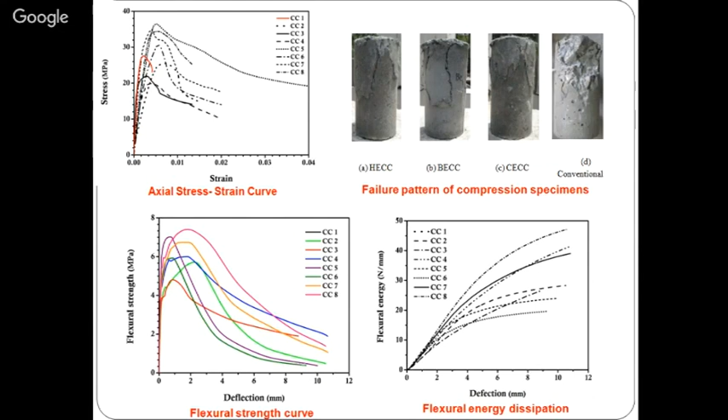When you're using this for large deformation, this is not recommended for the entire building. It will cost you a lot. That's why it is recommended only in the joint region. So when you're using different kinds of fibers in the joint, you can make the composite like this.

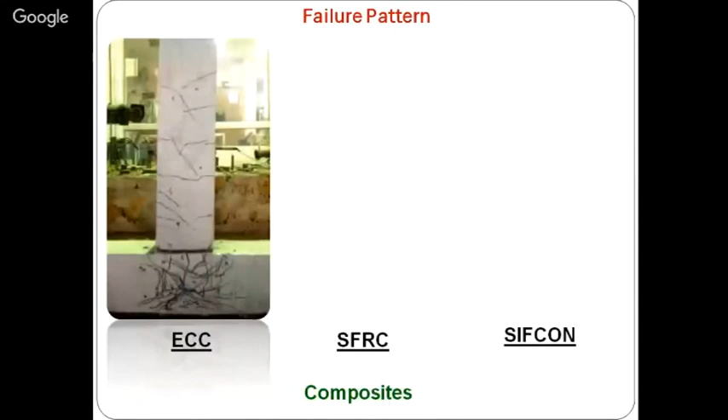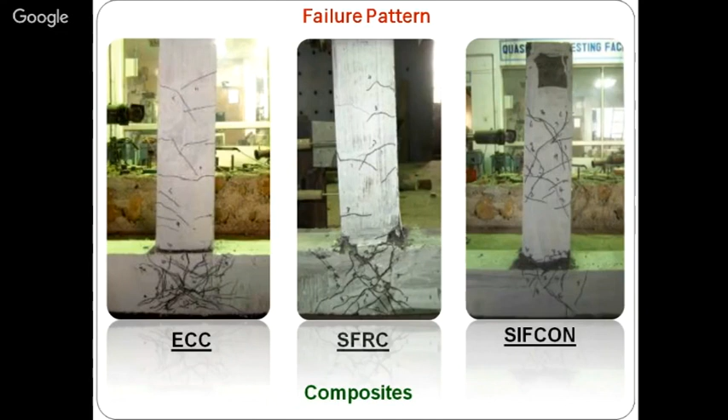So these are various failure patterns. In the previous conventional one, we can see concrete spalling. In fiber reinforced concrete, we can expect a huge number of cracks. Whereas in this kind of composite, you can see the joint is perfectly safe from collapse. So these are internal measures.

When you come to external confinement, what does it mean? I told you for the existing building, how to save the building by using some external measures for masonry structures. For RCC buildings, this is the only way we can improve the performance of the building, or save the building from any lateral deformations. This is generally referred to as external confinement using fiber reinforced polymer sheets.

This is how they have to perfectly confine the external part of the building at different levels, exactly at the joint level. When you confine exactly in the external region, this will induce triaxial force. Internally, we can expect two forces and externally one force; that is triaxial force. This triaxial force will perfectly confine the structure, especially the joint region, and it can save the structure from collapse.

The last one is base isolation. So what is base isolation? When you have base isolation, it's like the difference between traveling in a normal bus and a Volvo bus. So what is the difference between traveling in the normal bus and the Volvo bus? Anybody? Comfort. How do you feel the change in the comfort? Space, only space. Seats are comfortable. Next. What do you feel in an ordinary bus? What happens?

See, when you're traveling in a normal bus, and suppose the normal bus is crossing a speed breaker, that's why we have shock absorbers at different levels. Anyhow, the shock absorber will dissipate the force. These forces will transfer to the platform of the bus. Our seat is perfectly fixed to the platform. So you can feel the vibrations in the normal bus.

Have you ever traveled in a Volvo? Yes. So if the Volvo bus crosses the speed breaker, how do you feel? Why? What's the difference? What kind of technology? See, in the normal bus, the shock absorber is connected with the wheel. Whereas in Volvo, it is not always at the suspended level. If the engine is off, the bus will come down automatically. When you switch on the engine and give acceleration, the bus will go up.

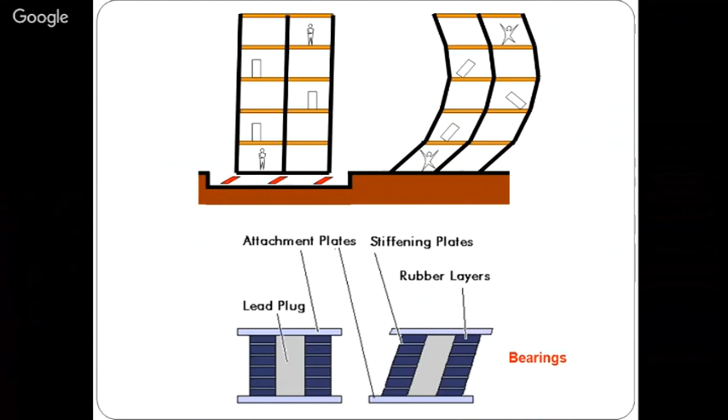So the bearings may be at different levels. We can use different types of materials in bearings. The first one is elastomeric bearing. The next one is roller pin bearing. The third one is friction based bearing. So this is how the bearing will allow the building to deform. You can see this is the deformed bearing.

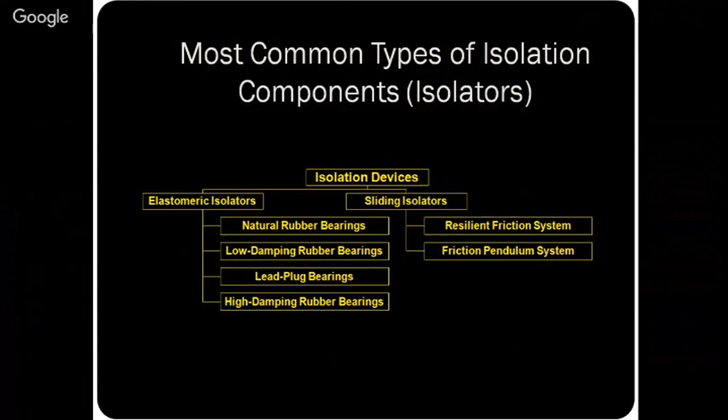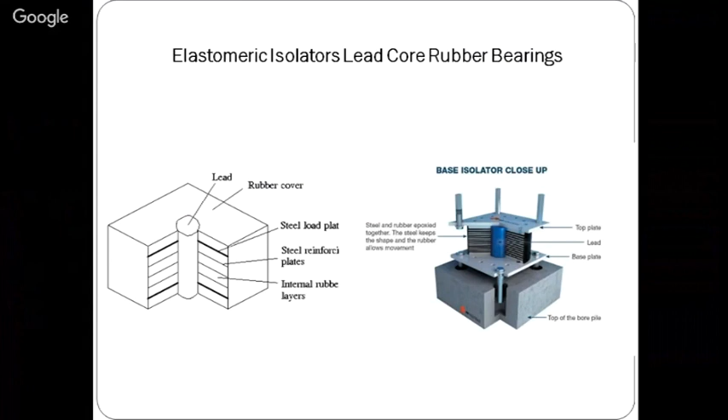So this is the internal part of the elastomeric bearing. Internally, we have a lead core or any solid core, because the entire building is going to rest on the bearing. So the bearing should have the ability to resist the compressive force. If you have a rubber band, this is not going to resist. That's why you can see the internal structure of the bearing. Internally, we have a solid lead core supported by rubbers and steel plates. This will take the axial load as well as lateral deformations. This is another bearing. This is also another bearing.

Next one is active damping system. So when you're constructing a building of height 10 stories, it is okay. When you're constructing a building of 20, 30, 40, 100 stories, we can't design the building by considering the earthquake forces alone. When you're constructing a building of 10 stories, there is no need to consider the wind force when you're considering earthquake force. Earthquake force is larger than wind force up to a certain height. When you're going for a 100-story building, it is very difficult to consider earthquake forces alone.

A 100-story building means it is going to have 100 different mode shapes. The mode shape is nothing but the deformed shape of the building. So it is going to have sinusoidal deformation at different levels. So it is very difficult to make the building an earthquake resistant one.

In such cases, you may ask me, why can't we go for a damping system? We can, but if your building is very slender, the damping is also not going to support you a lot. That's why we have to go for an active damping system. It's not going to be base isolation. It is going to be an active damping system. How will the active damping system help you to resist the lateral deformation? Let's see in a video.

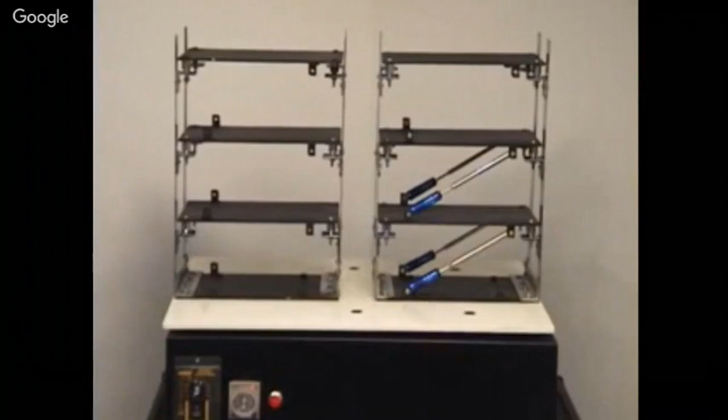You can see the first building has no active damping system, whereas the second building has a damping system. So when the building is subjected to vibration, how is the active damping system going to help you to resist the lateral deformation? You can see or experience it from this video. Now they are giving lateral forces using a small shake table. This is how active damping systems help you to resist the lateral force.

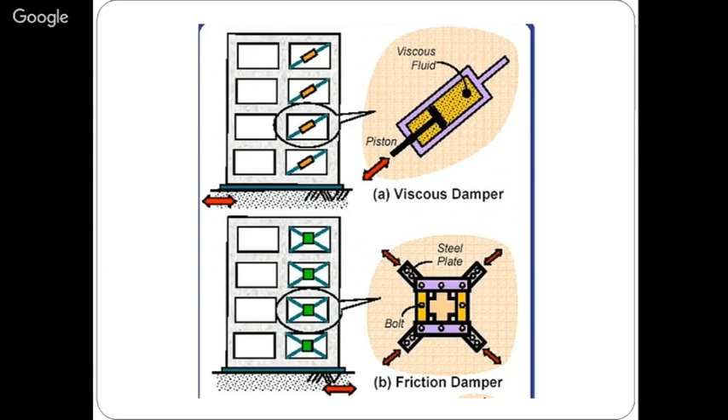So this can be easily implemented. You can easily fix this damping system anywhere in the building because it is an external part. It is not going to be an internal part. You have to connect the link between column and beam as defined in this picture. This damper comes in many types, like viscous damper and friction damper. So based on the requirement of the building, we have to choose the damper and the location of connections. It can be connected in L shape, X shape, or any shape as defined in this picture.

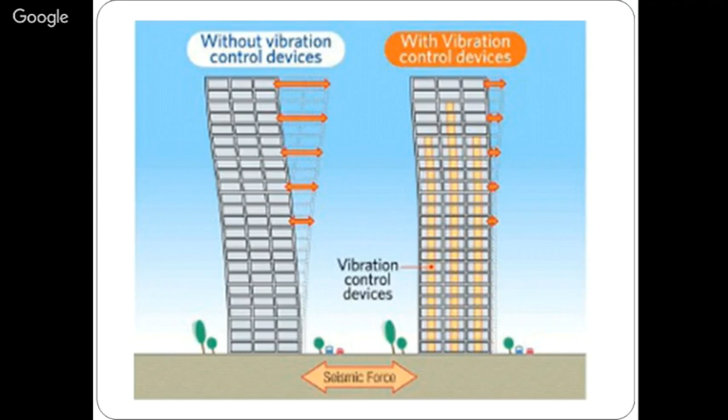So this is a perfect example of how they have connected the damping system in an existing building. So this is how the damping system will help you to reduce or resist any deformation during an earthquake. Thank you.